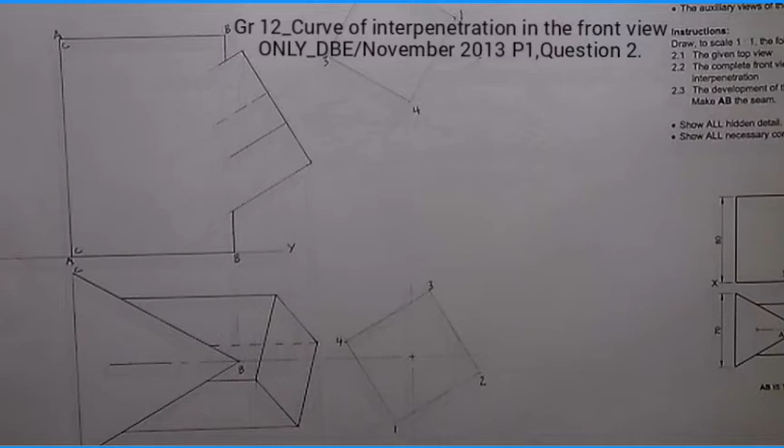This would be 4, that would be 3, that would be 2, and that would be 1. Then here I will get 4, here I will get 1, there I will get 3, then here I will have number 2. Then from there I want to determine the first point of penetration.

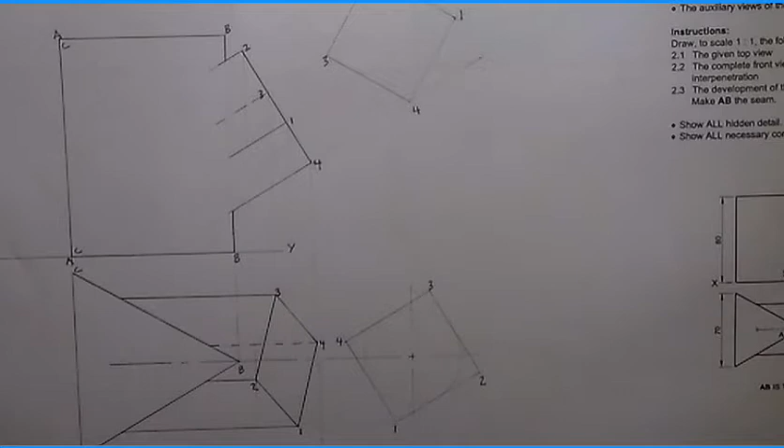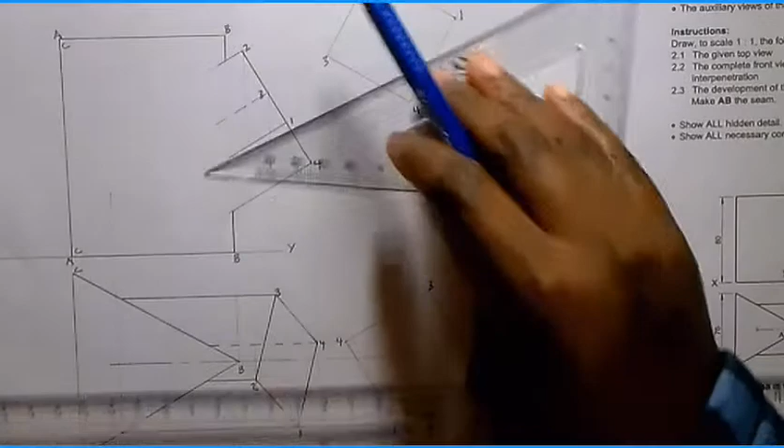I will start with point 1 here. From the top you see this one here, so 1 will penetrate from this length here. This is what I can see, that 1 will penetrate from that point there. So if I take it there, I know 1 is going to penetrate from the front. So that will be 1, penetrating here on this point.

That will be 1. Then I look for line number 2, to say now line number 2 will penetrate here, going up in this type of line, and that 2 will penetrate in there, and that will be 2. Alright, I just want to cut the line weight because it must be in hidden details. I still have to come back and decide which one is a type of line and which one is a hidden detail and so on. Then let us go to number 3.

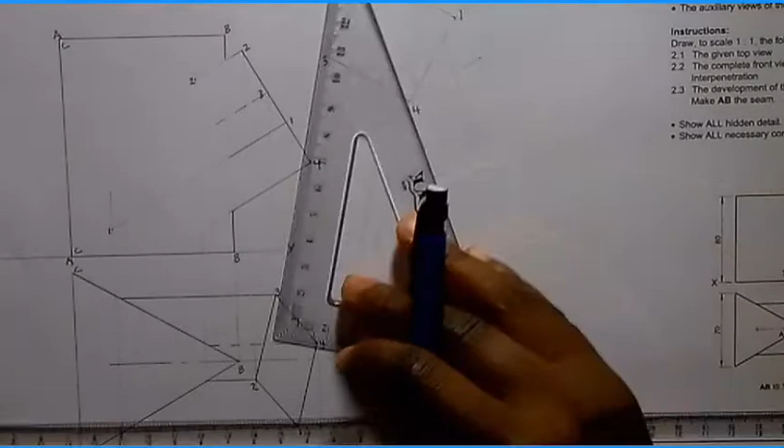Number 3 will cut here. It's almost in the middle, but I will have to take it up. So number 3 will cut here in hidden details. So I know that at that point there, I'll be having number 3.

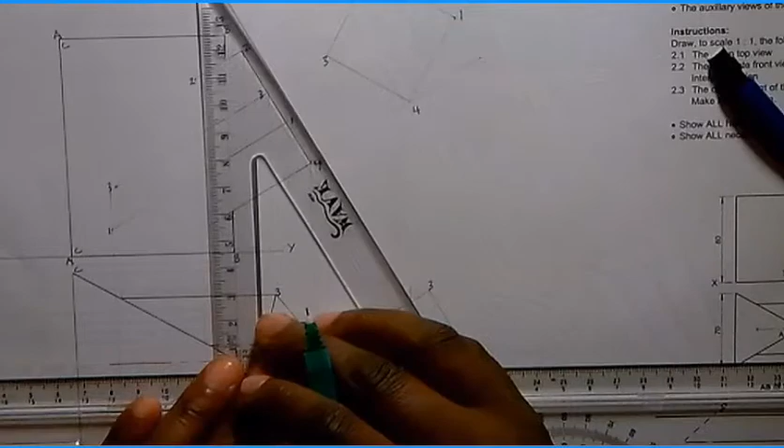Then number 4 will cut here at the bottom. This one at 4, it's almost already in, I believe it's not 100%. Alright, so I know now that at that point I have point 4 there.

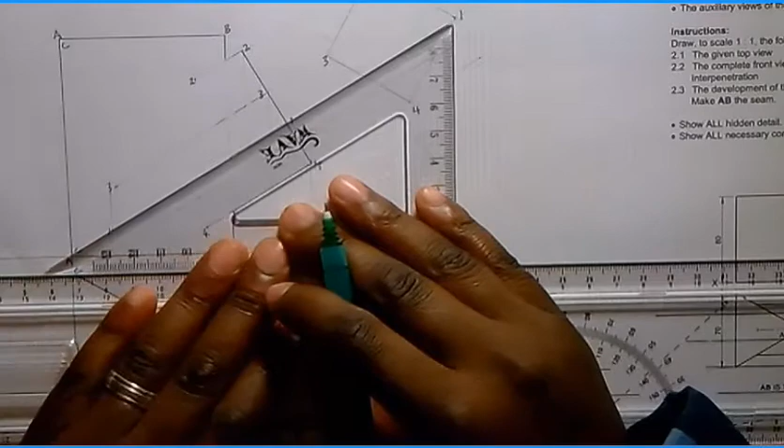Then from there I decide on the lines that are visible. One is visible, a type of line. From the front, I can see now this line 1 is visible, all of it, this line here. Remember, it is visible, all of it. Then I look at lines such as line 2, which is also visible. I was correct to throw it in as a type of line.

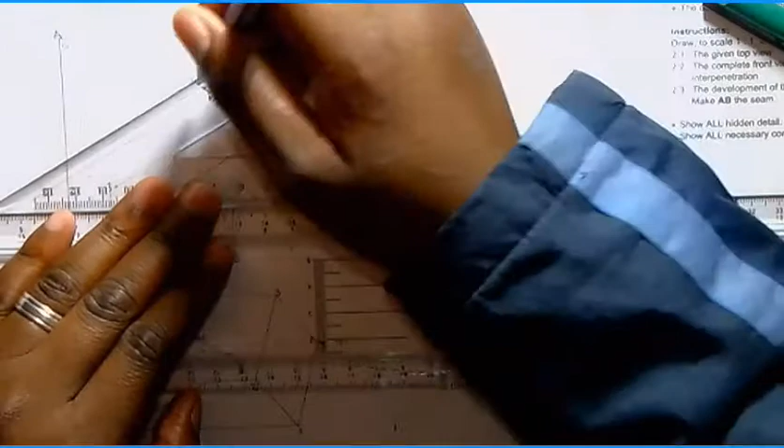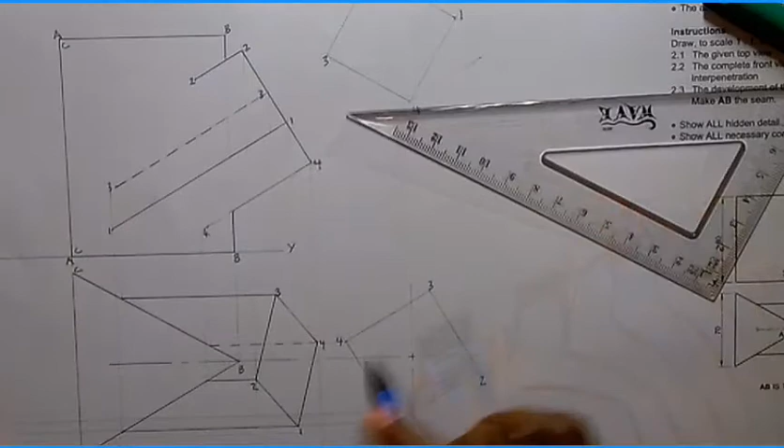Then line 3 is in hidden details, so this line 3 I can just complete what I have started in hidden details there. Alright, then from there I look at line number 4, which will also be visible. I will speak about line number 4... let me not do it like that. It won't be so much visible because it will be in hidden details. So I will speak about number 4.

What must happen now? Alright, then from there, the turning point will be at B. I have only one turning point there. So I am going to move in this point to say when I move from 1 in direction of 2, I don't pass... meaning you must understand here that here at the back, this is 1, 2 will penetrate there, 4 will be here, and this will be 3.

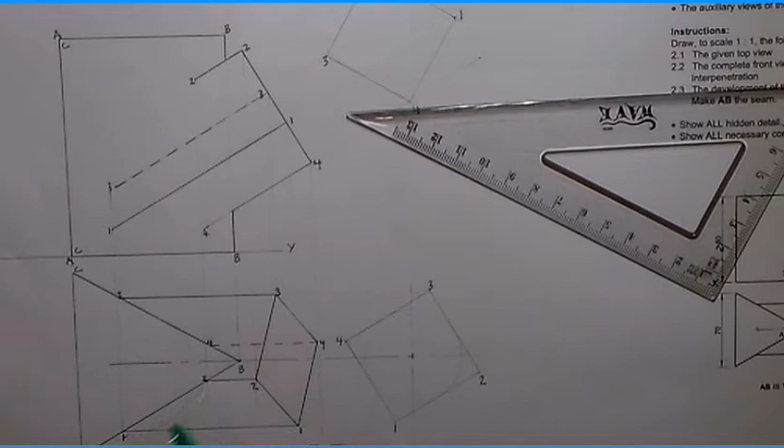So when I move from 1 in direction of 2 here, this one here, I move from that 1 to that 2 there, I will just move straight in a type of line. I do not pass any turning point, so I just move straight.

Then from 2 to 3, when I move from 2 to that 3 there, I must pass through the turning point at B, between 2 and 3. Then I will arrive at number 3. So if that is the case, what I will do by means of construction is take in this point B to cut between 2 and 3.

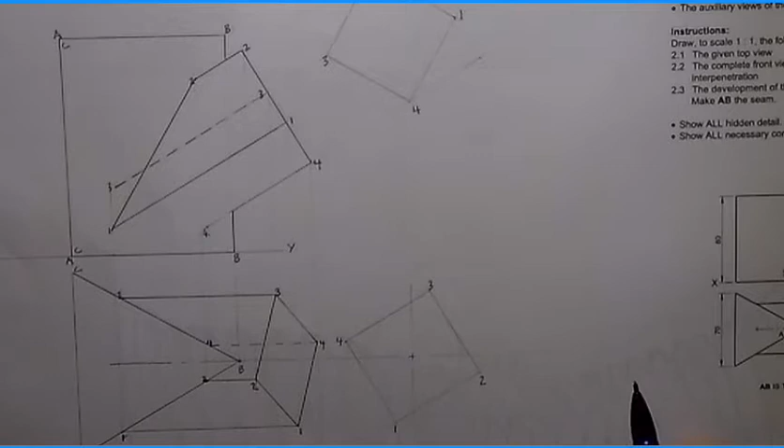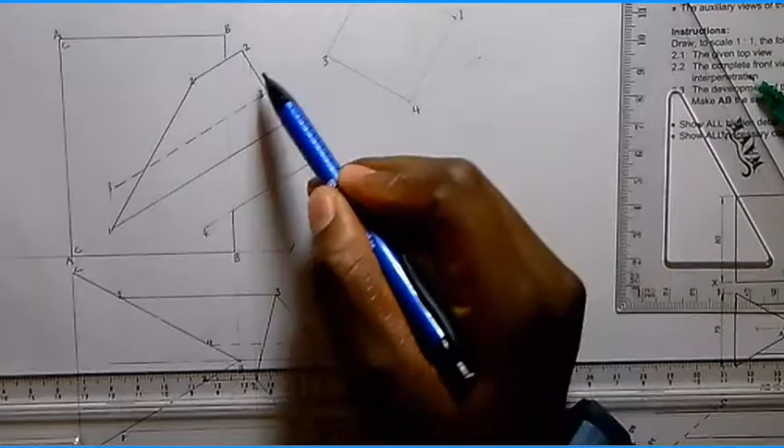Meaning it will cut here, between 2 and 3 to cut there. Then from there I can take it up to cut at B. So with this construction, I allow it to go and cut there. Immediately when it cuts there, you are able to see here it is between 3 and 2, then it is 1. I can cut it up to there. This is my turning point.

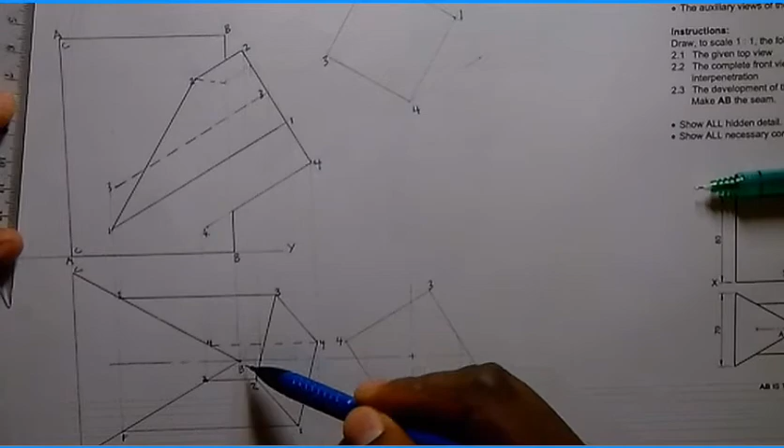So from 2, I pass through this turning point in hidden details, it will be at the back. Then from those hidden details, because now it is going towards the back, then from there to 3, it will go in hidden details. I'll just continue up to number 3 in hidden details.

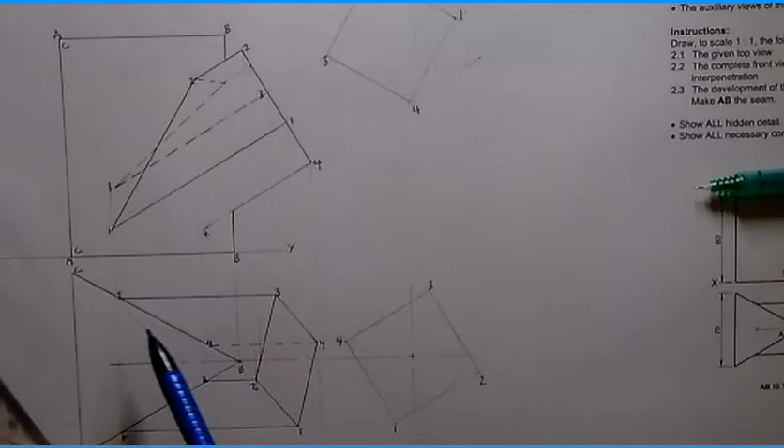Then when I move from 3 to 4, I'll just go in hidden details here because it is already at the back. Immediately when I came here, I started to move from 1, passed 2, and arrived at... then immediately when I turn, everything going that side is going to be in hidden details. So from 3 here to 4, I will also go in hidden details, so this one is also in hidden details.

Then now, the most critical part is this one here. What must happen now here? What is going to happen when you look from the bottom, you can see now that from 4 back to 1, from 4 back to 1, I pass through the turning point again.

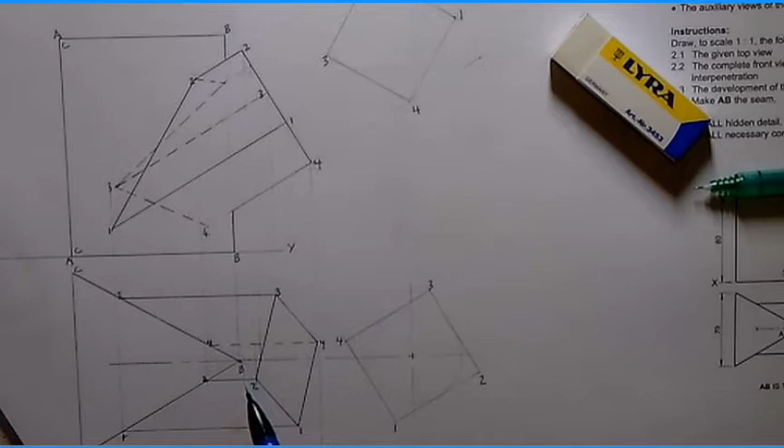So this turning point, this time around, I'm going to take it from here because 1 and 4 is on this side, so I do what I did there. Fine, so I'm saying now this one will go to the top there.

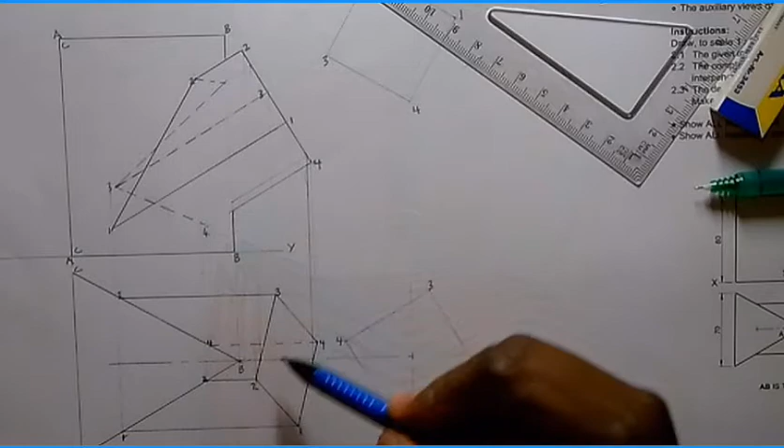Then now I allow it to cut at point B. So when I look at it, it will cut here. So when I move from 4 in hidden details, it is still in hidden details up to B. I go from 4 through turning point in hidden details.

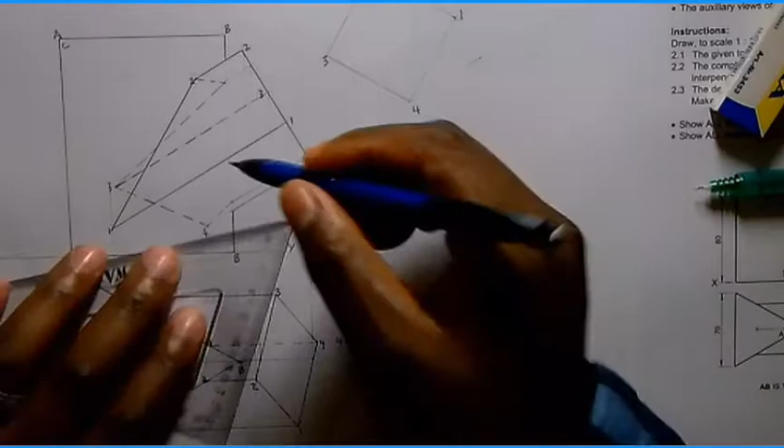Then from these hidden details, I can go back to 1 in a type of line. So here it is going to be visible when I move from turning point to 1 here, it will be a visible line. Then it simply tells me that this part here of the drawing will be in a type of line, and this small portion will have to be in hidden details.

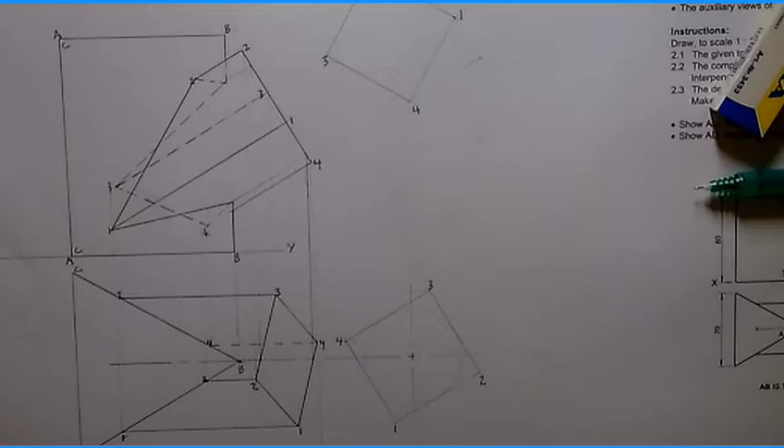That is what I can really share at the moment. So then from there, what I need is this line there, to say from 4 up there, as it penetrates, it goes to the inside in hidden details again here. So here I also have small hidden details.

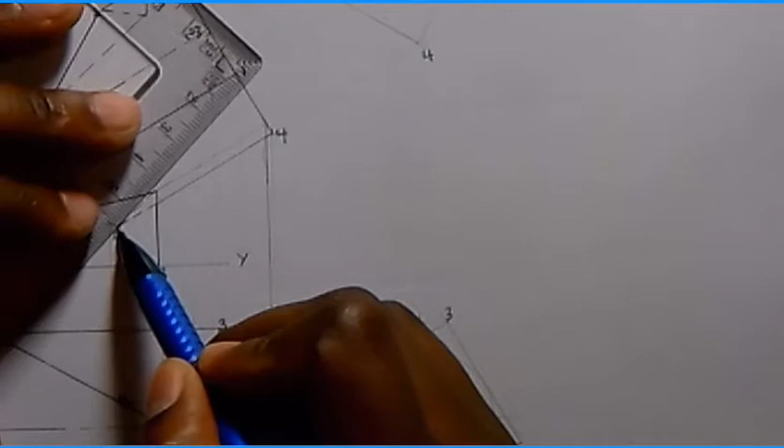So you need to zoom nicely on this area here so that you understand it better, what is actually happening. Let me try to be hard on this hidden details so that you see what is really happening around that. Then from there, when I'm done, I believe the curve of penetration is complete, just like that. Nothing more, nothing less.

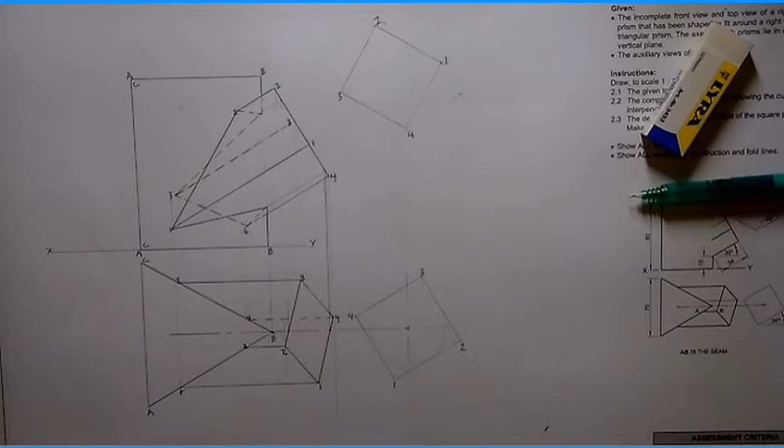But what I can say around it, I can now move to the development of this surface. So as I move to the development of this surface, we now need to remember the principles of development. I just want to check here.

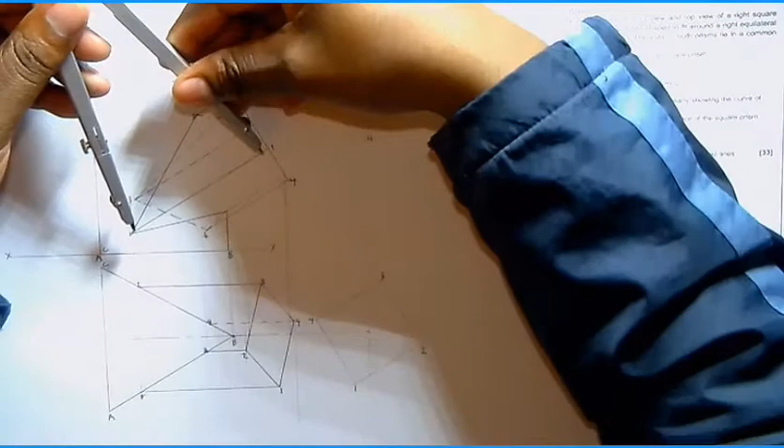If I plan my development, the longest length will be in this one here. Line 1 is the most long line. So I want to check if I plan in my answer correctly. I was instructed that I make line AB the seam. So if you can look here, if I was correct, I was supposed to name this line AB the seam here.

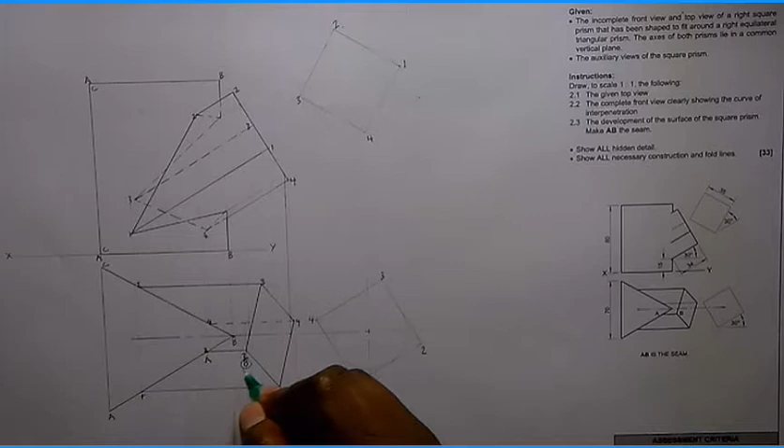So line AB will be from that point to that point. Has to be the seam. They asked me to start on that line. So immediately when I start on that line, that will be line number 2.

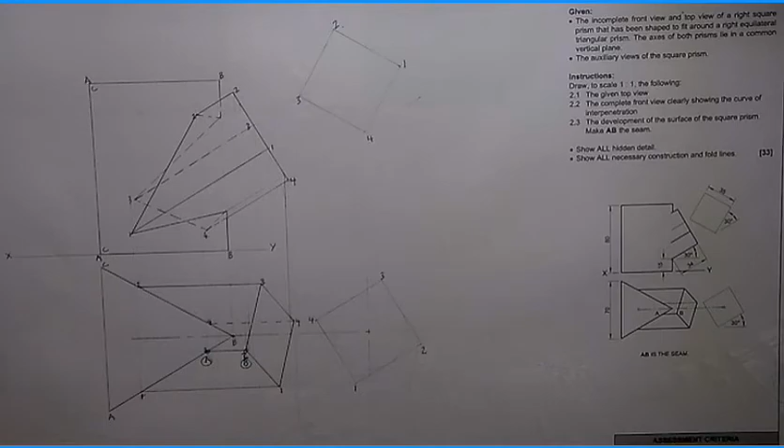So as I move to the side here, I can decide to start here on the side so that these other lines don't really touch. Alright, so when I start my development, I can start from this side just to be safe enough, because now I need to plan. Planning is always essential.

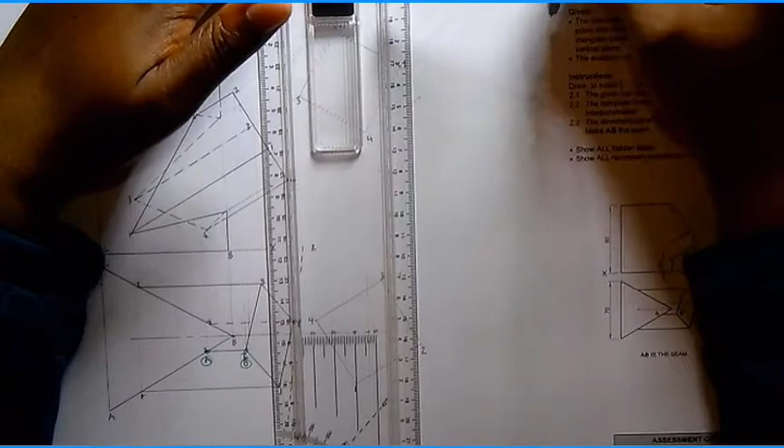I need to do the planning. Alright, let me see now. I think that is one. Alright, this one, that one is quite big. Alright, I will start that one.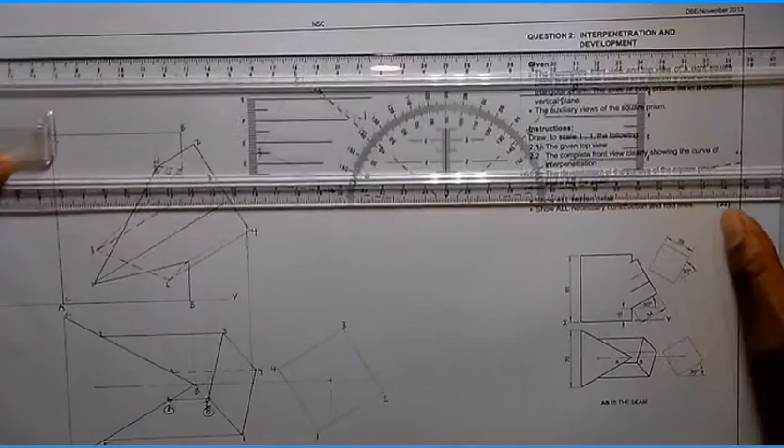So if I plan, I can just put in my base here on the side. I'm not sure if you are able to see. I can just put in my base there, and I decide that I will start my development from this side. So as I start my development from this side, I say now that is line A, B, going to that direction.

So as I go to line AB in that direction, I take the distance from line AB here. You'll be able to see now that is the line AB. And remember the principle of true length, which states that when a line lies parallel to the XY line, the opposite will be the true length. So the true length will only be from here. Here you will never get the true length.

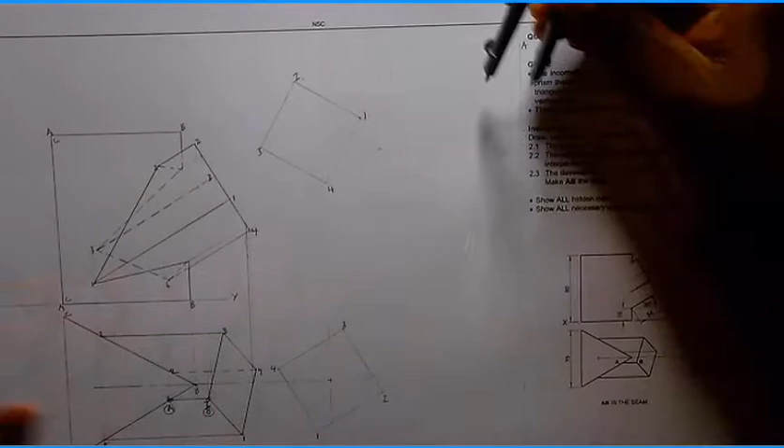So just be careful. So I know now the moment that point there, that will be point AB anyway, even though it is upside down, but then it is AB. That is what is important.

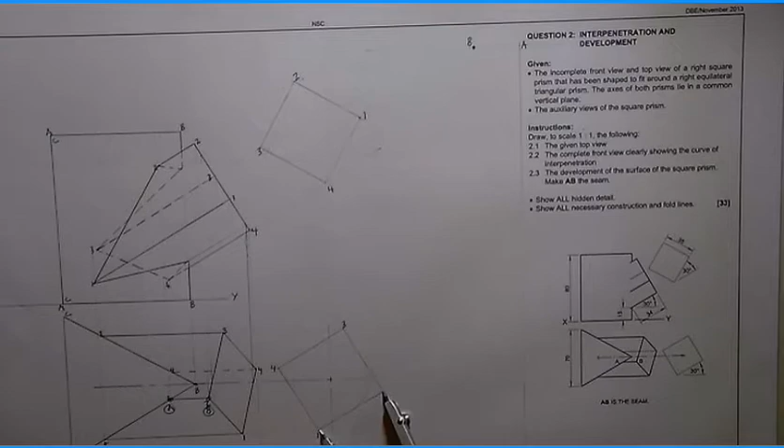Then we develop the square, if you remember. So if we develop the square, the true length will only be taken from the auxiliary view. Remember that true length was 35. Yes, let me just take it there. It was 35 from the auxiliary view.

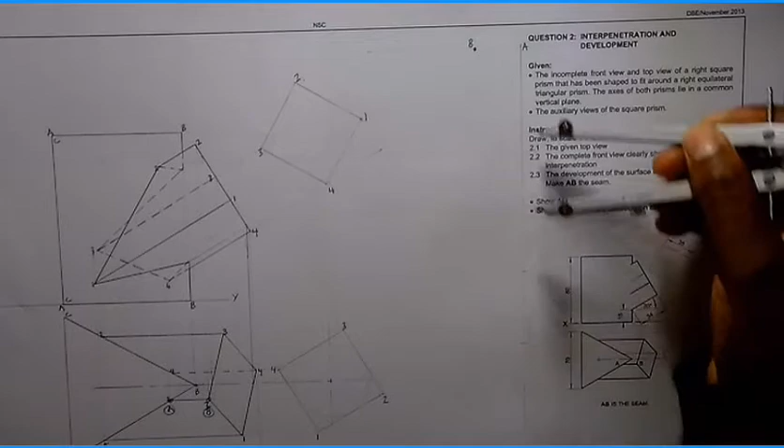So from there I can cut it off, trying to get all four parts of the square. That will be face 1, face 2, face 3, and part number 4. So when I read in between, it's 1, 2, 3, 4 sides of the square. So from 1, which is the starting point, which was this one here, it was almost 2. Then from 2 I can go to 1, 4, 3. It doesn't matter which order I use, but I decide to go this way.

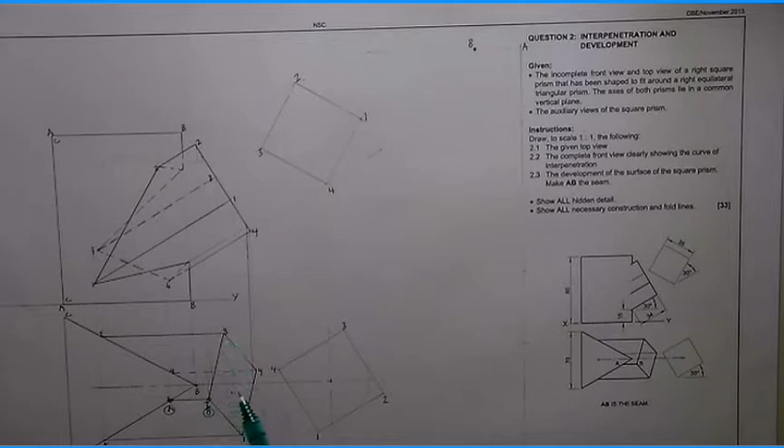Let me decide to say now. I'll go to 3, then to 4, then to 1, and back to A, which is 2.

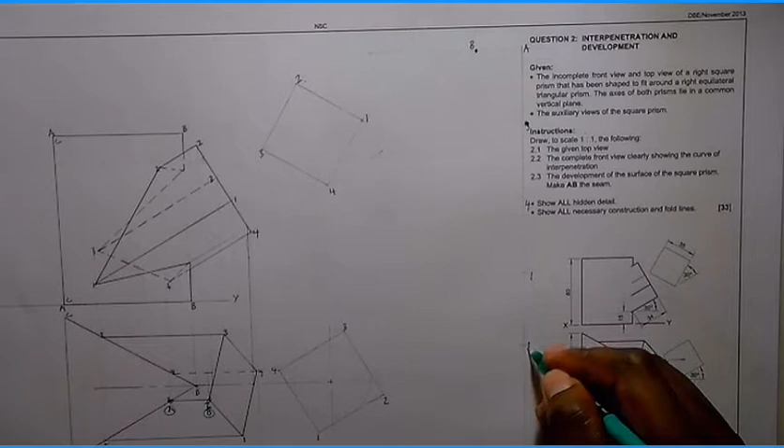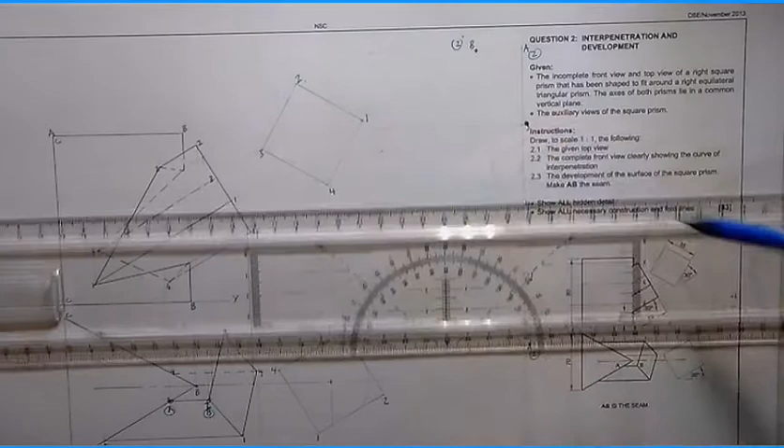So that I am able to do it, I need to pass this other one, pass there, that other one also passes, and the last one obviously will pass. So if you check that other point, it is also cut there. That is what I understand.

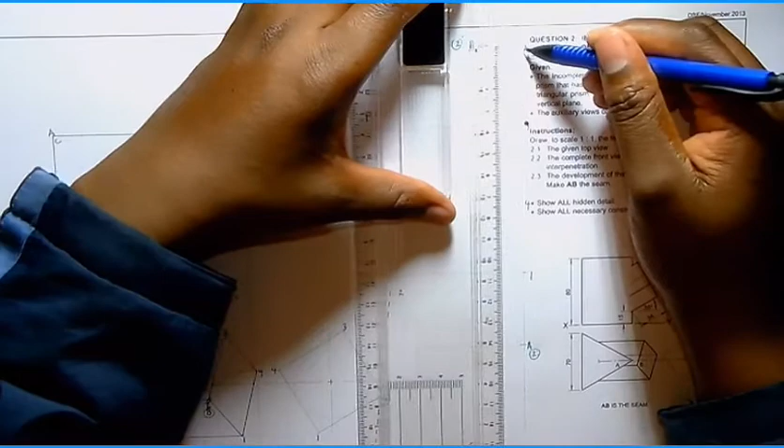The entire base at the moment will be visible in A type of line, and this part here, line A, will be visible in A type of line. That is the entire size of my development.

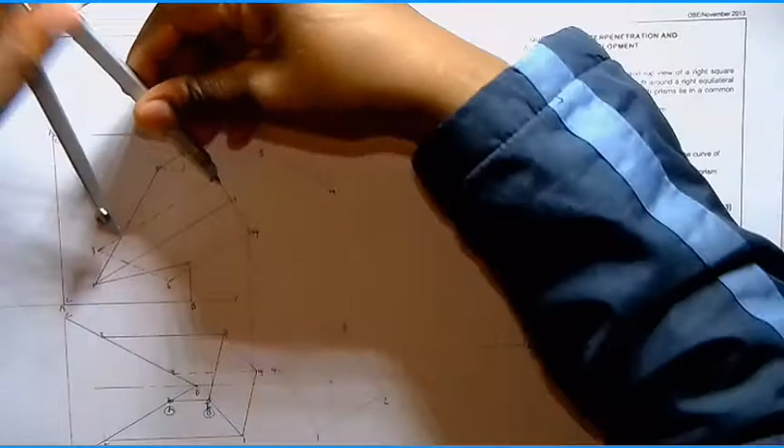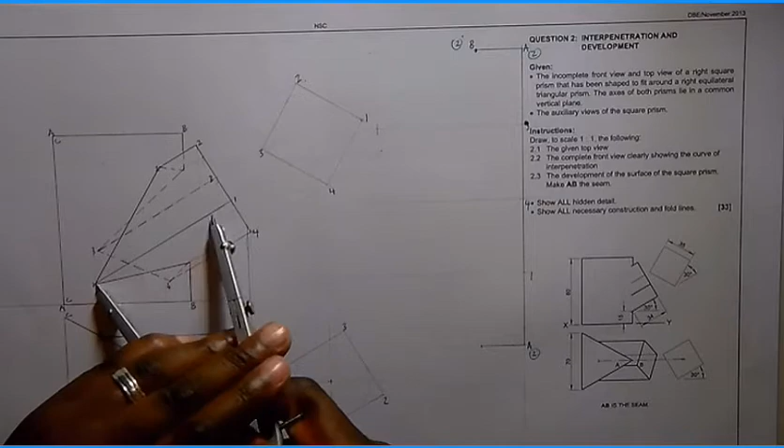Let me just take somewhere 1, because the compass is almost open to its full length. So 1 is here, I put it, and from there I can take in 4. Remember what is going to happen now.

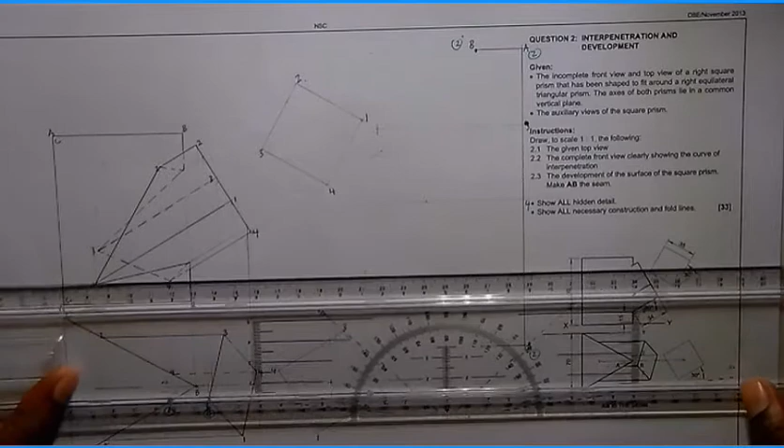Around line 1, 2, 3, 4, that is where I have the fold lines. When you do the fold lines, you need a B type of line. In terms of the drawing principle, you do all the fold lines in B type lines. Remember, the B type lines are not constructions and are not A type lines, they are just medium lines. They are B, very soft lines. That is what we do.

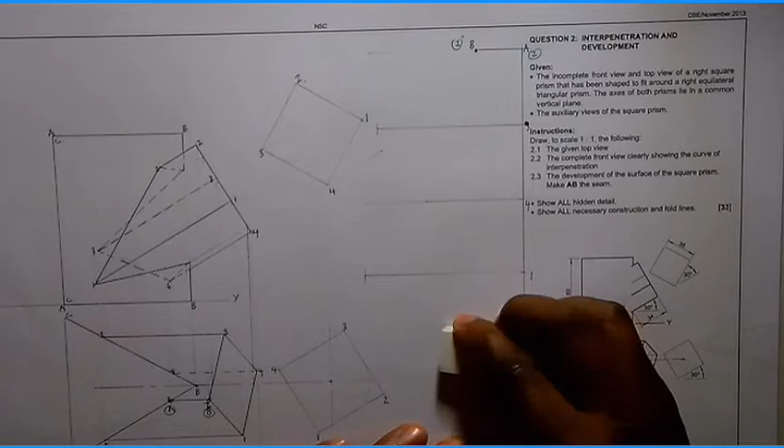Let me just cut these unnecessary lengths today so that you can see how nice the development is.

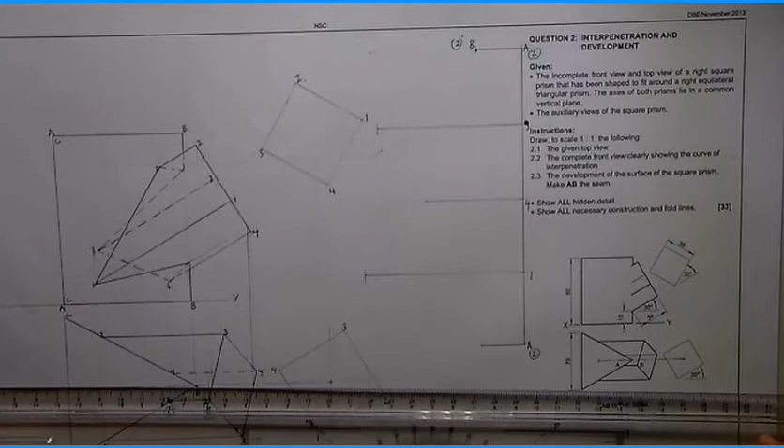Then from there, if I am done, I need to consider the turning points in between, the turning point at B. So when I decide on the turning point, I say this line at turning point, from the top here, turning point starts in here, turning point 1, and turning point number 2 comes here. I have only one more turning point. Let me name them: this was turning point number 1, and this was turning point number 2.

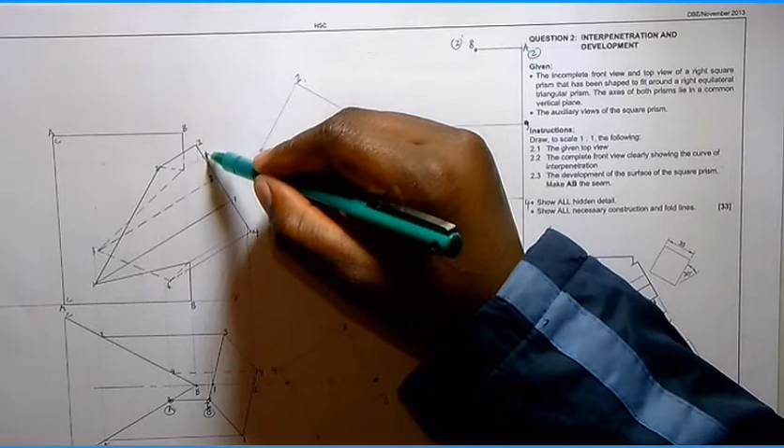So turning point number 1 at the front will be here, that will be turning point number 1. Turning point number 2 will be here. So turning point number 1 is between 3 and 2, is this one? Turning point number 2 is there. If you remember, turning point number 2 is between 4 and 1, then number 1 is there. That is why it is the other way around.

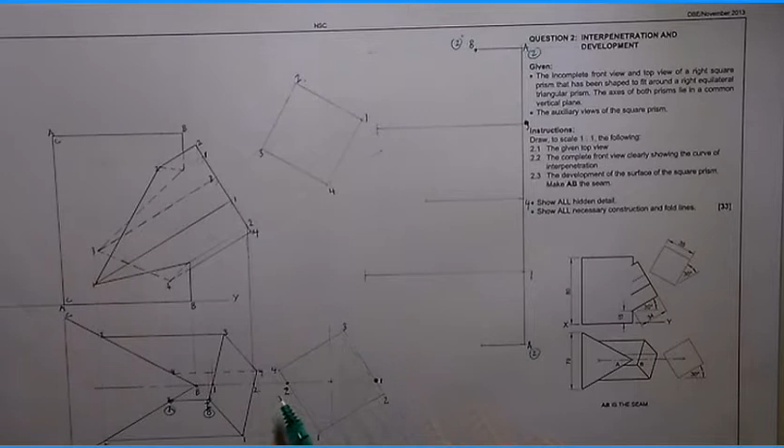So what I do is that when I stand at 2 in direction of 3, I pass through the turning point, so I need that small distance. When I am at 2 in direction of 3, I look ways to 2, this one here. From 2 in direction of 3, I see the turning point. Then from 4 in direction of 1, I see the turning point, it's almost the same size. From 4 in direction of 1, I see the turning point. I have only 2 turning points.

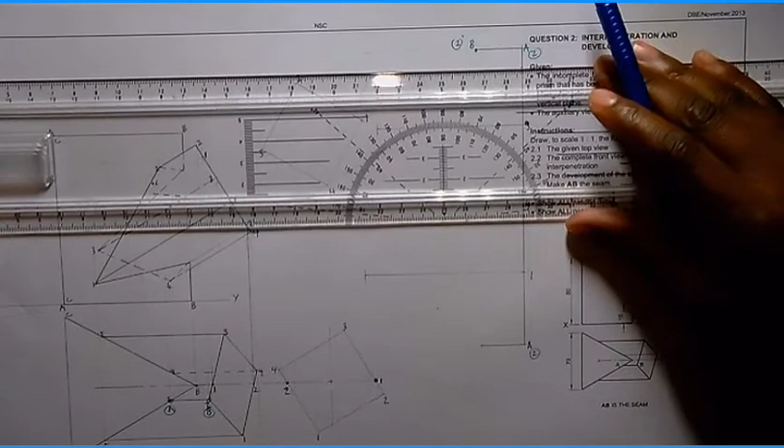Then from there, easy type of line for now, I can just draw it, try to draw it there, and now I can measure the distance. So the distance for the following turning point between 4 and 1, I have turning point at 2. So turning point at 2, the distance for turning point will be this one.

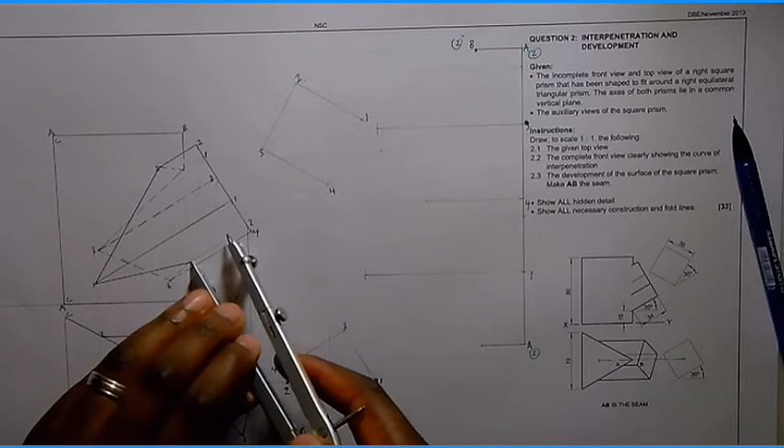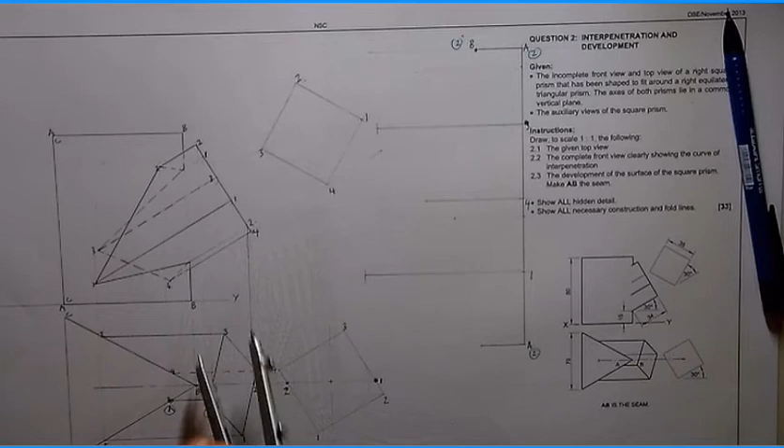It will be from the point of turning, which is 2. So this is the turning point there. It will be either. Then between which one did I take now? Between 4 and 1, okay, that one. Then between 3 and 2, I must take this one. Between 3 and 2, so it's when I move from 2 in direction of 3. It is around this point there.

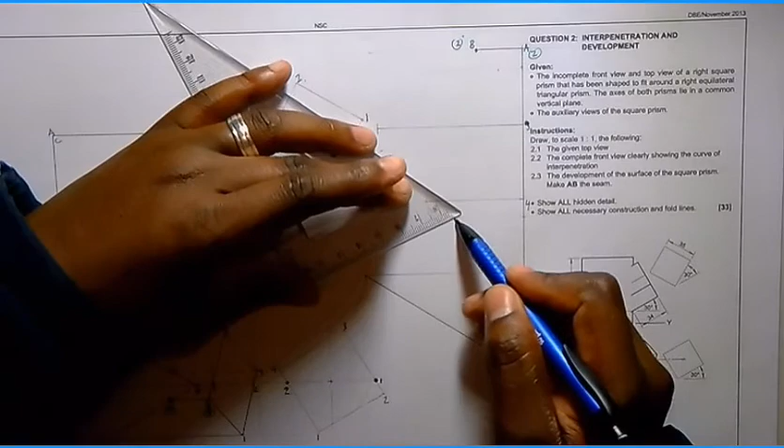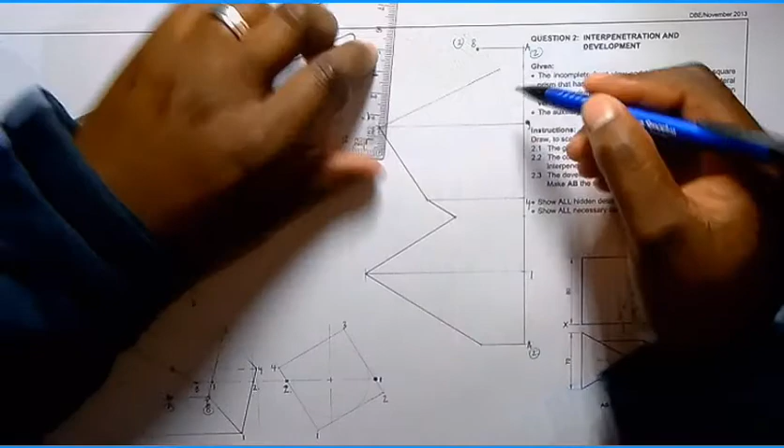Then from there you can see the development, the third part of the development in a type of line. We move from there, then before it reaches 4, it passes through the turning point. So that one will go through the turning point. From the turning point, it will go straight to 4. Then from 4, it can go back to 3. Then from 3, it can go back to the turning point at 1. Then from the turning point at 1, it will go back to C.

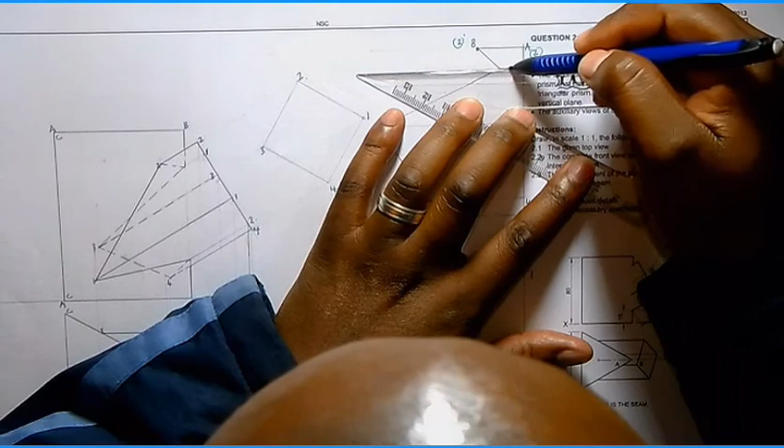So now, these lines around the turning points, you complete them in some sort of chain line, just like when you do your center line. You don't complete them as fold lines that are solid, because the only purpose is to indicate that the drawing is turning around those lines. It doesn't actually fold, but it turns around that line.

So if that is the case, the entire answer, I will stop it there, because I did answer everything in terms of the question and what was asked from me. So from me to you, I am quite happy.